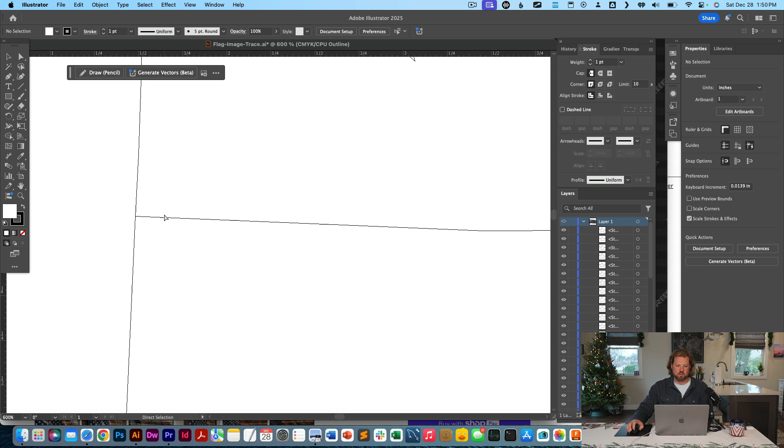So I started in Adobe Illustrator using Image Trace. And then I had to spend a couple hours kind of cleaning the image up. These stars did not draw properly from Image Trace, so I had to make a star for each one of them. And the real important thing is that every line crossing actually does land on the exact same point, so that when you export this to like an SVG or something, you get something in your CAD software, CAM software that just kind of works. So this took quite a while of cleanup, but once it was done, I kind of had what I needed here, and then I could export this as an SVG and bring it into CAM software.

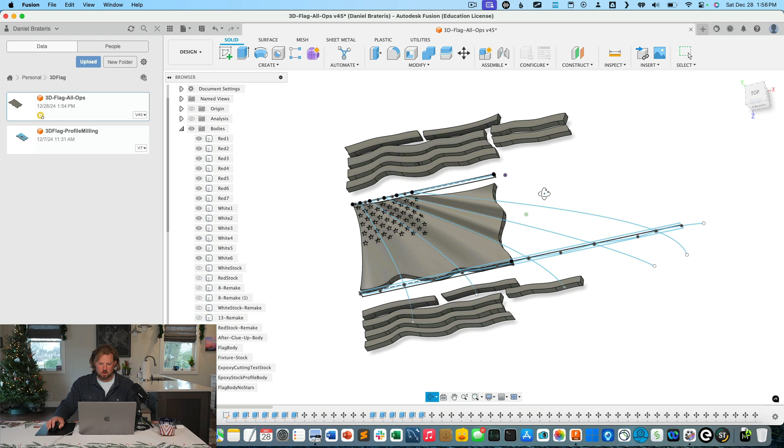So once we exported that file from our graphics software, we brought it into Fusion 360 here, and I made several things from it. So I made a solid body to represent the whole flag, and then I made separate solid bodies for the individual components that make up each part of the stripes.

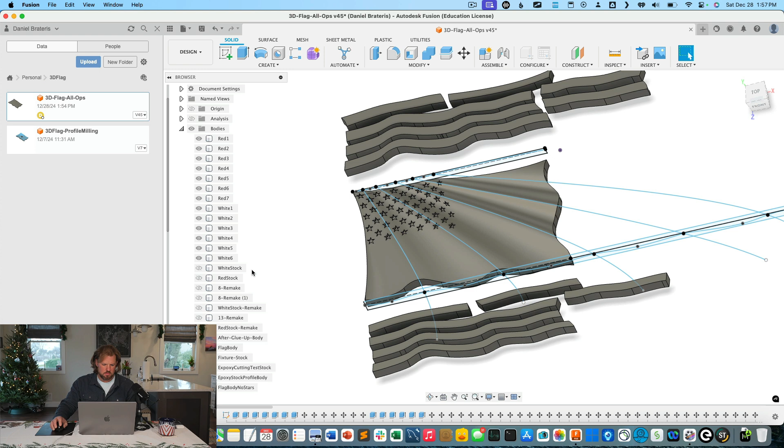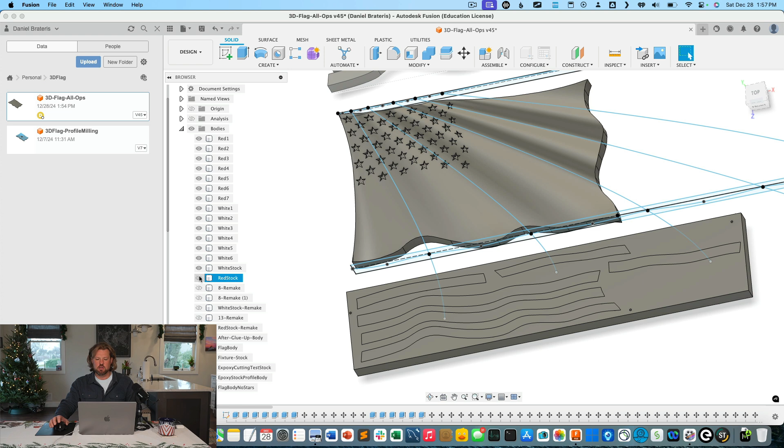And you can see that this is the stock that the stripes are going to be cut out of. And here's the stock the red stripes are going to be cut out of. So that's in cherry, and this is in hard maple. And one big mistake I made here is I really needed a larger piece of wood. This was just not enough space in between each stripe there to give us enough clearance to make really good hold down patterns and things like that.

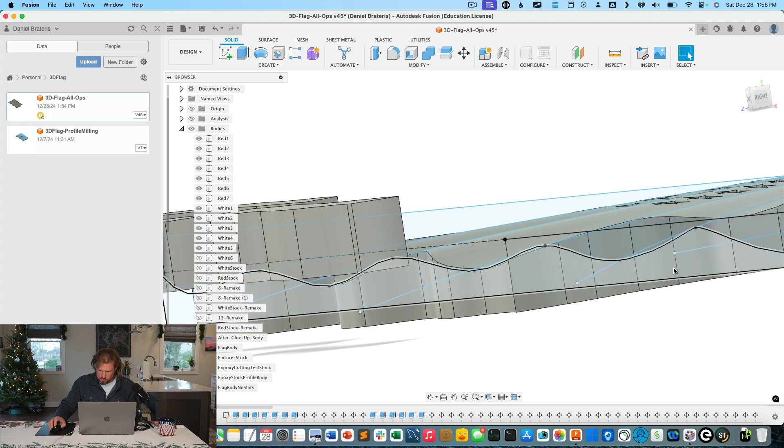And then making the body here, we started with sort of a flat body and generated these guide curves. So I don't know if you can see this sketch on this edge here has a bunch of waves in it, these waves here, and they are cut through the body and follow these guide curves over to a smaller profile on this side. And this allows me to control the depth of these cuts so that when I eventually put the epoxy in here, there'll be enough depth for each star. So I had to kind of tightly control that.

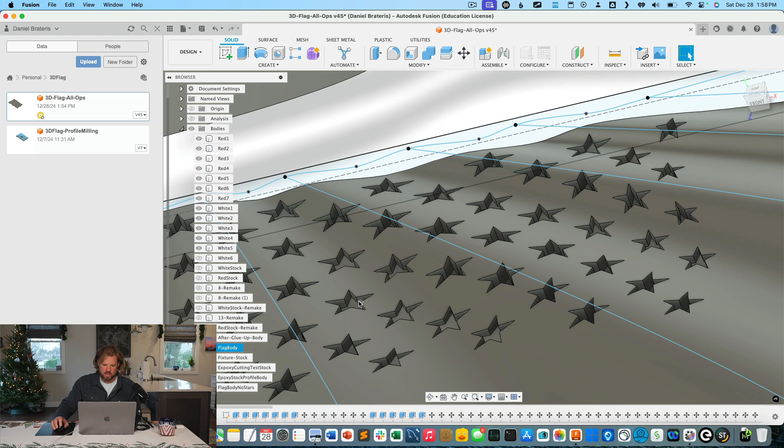I really only thought I could mill down about 0.5 inch with the size tools I had, and didn't really want to risk going really small with tools. This is what we did in Fusion, and I'll start showing you how this all came together.

So what we're starting here is by using a thickness planer to just kind of take the rough edges off both surfaces of the wood. And then we let the wood sit for a couple days before we mill it, just to let some moisture out, moisture in, just to let the wood stabilize. And that's pretty critical, so that it remains flat. I had to go back on the thickness planer again to flatten it out just a little bit more.

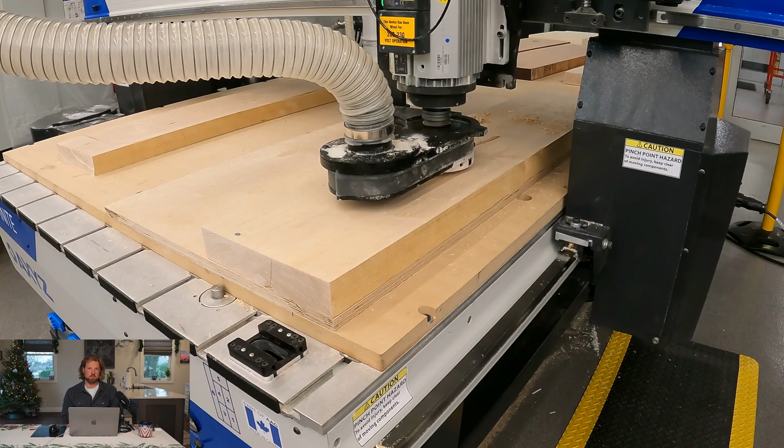And now we use the CNC to drill some strategic holes. So these holes are areas where I know the tool's not going to travel, where I can put screws to hold this piece of wood down to the table. So that piece of plywood underneath is vacuumed to the surface of the machine through a pretty strong vacuum, and this wood is not really flat enough, nor does it really have enough surface area, in my opinion. So basically, it gets screwed to the piece of wood that's vacuumed to the table, and now we mill those pieces out.

Now, ideally, I would have been able to mill straight down and through the piece of wood into the piece of plywood below it. But we were having some issues with splintering, and as you can see, I'm having a little bit of issue with dust collection there. I think this is due to the kind of tool that I had in the machine at this time, but we were getting through it, and where we ended up was just leaving about 0.2, maybe 0.1 of an inch on the bottom there.

So you can see that these pieces aren't cut all the way through, and then I use a bandsaw to cut those individual pieces out. And once that's done, we'll go over to a router table and use a copy bit to bring these pieces to size. Ideally, I could have skipped this step, but we were having some struggles with the machine and the wood splintering and curling up when we went to put tabs in it.

So this was the compromise, and now just using a copy bit to remove that excess material on the bottom. This worked really well, but was quite a bit of extra labor that I didn't really think was going to be needed to make these pieces. I think we could do better in the future.

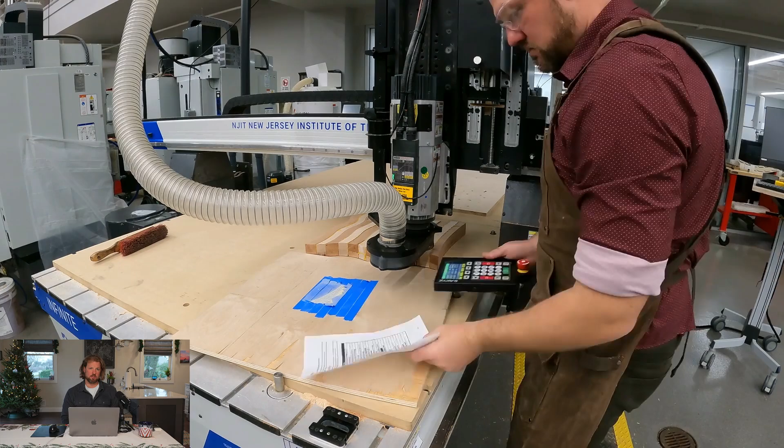And now I'm just using pieces of wood that are vacuumed to the table as a kind of rudimentary fixture to hold this thing in place when we face mill it. I'd love to put clamps on top of it, but then you can't face the whole thing in one pass. And to take light passes, this seems to work pretty well.

So you just take a light pass and block the piece of wood in with other wood on the vacuum table to hold it, and do both sides of this so that we have a pretty flat surface on both sides. And then we'll move on to prepping some of the seal coat epoxy.

So this is leftover resin from one of our colleagues' projects here. So thanks, Adam. This was for a surfboard he was making. And just wanted to seal the inside surface of where the deep pour is going to be to prevent any bubbles forming during the pour.

And here what I'm doing is drilling holes on the back side of the pour area so that the epoxy can flow into those areas to create an anchor point, so that it's not only holding on the surface. And now just seal coating this with epoxy, making sure I get into those holes with a brush, and sealing it up and let it cure for a day or so after this.

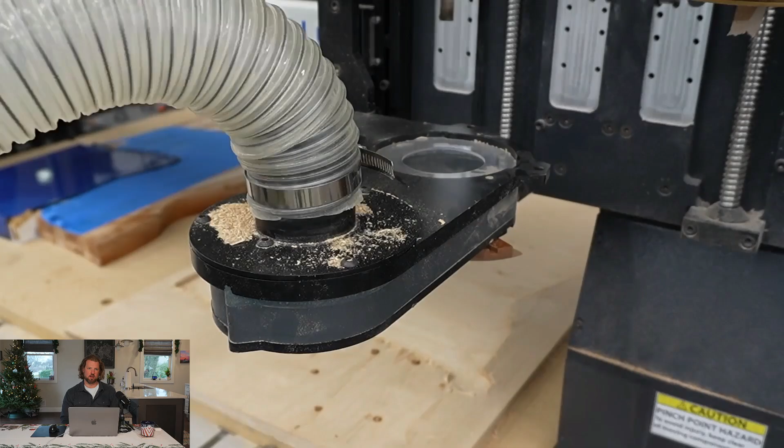And you can see we have a pocket milled there for the epoxy overshoot. And then what we use to hold this down is clamps. So you can see these two wooden clamps. Thanks, Danny, for helping me make those and think about the way to do it.

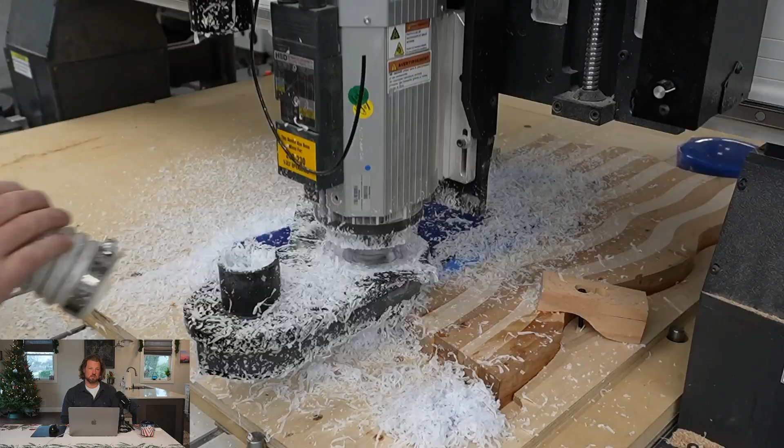These epoxy chips, man, for us, it just clogged the hell out of the dust collection system. So got some changes to make there as well. But it worked really nicely. These clamps held it down very well.

And then later, when we need to access the whole top, like now, we use little wedges. So there's about a millimeter gap around one side of the profile of the fixture of the flag that is in there, and we can use little wooden wedges that we can tap in to that gap to hold it down securely. And then if the tool comes around, it just mills that part of the clamp away. That worked really, really nicely for this.

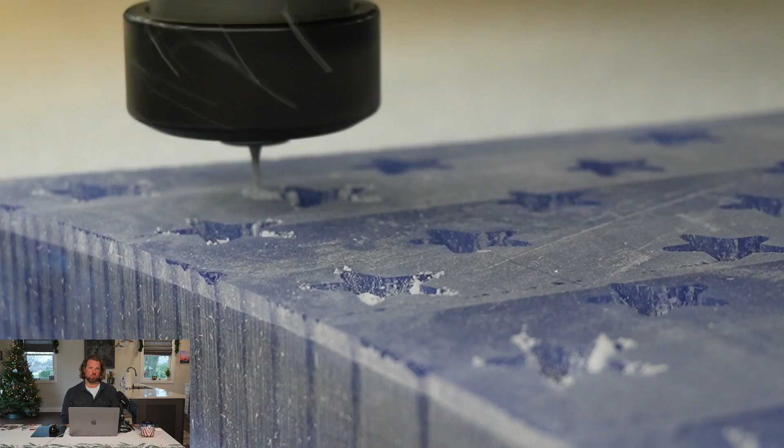And now we use two really tiny tools. I think one is a 1/16 inch end mill. And so that's what's going on here. We started with a 1/8 to do most of the roughing, and then use a tiny little tool to come in and mill the pockets for all these stars.

And using some hot glue to create a dam. Silicone would work just as well, but the hot glue sets up nice and fast, and I'm not pouring a ton of epoxy, so I think the hot glue works just fine in this case.

And mix up a batch of epoxy, so I'm just double checking my dimensions, and I actually used Fusion 360 to generate the volume of one of those pockets for the star. Multiply that by 100, since I'm making two flags, and then added a little extra volume, so I had enough to overflow all the stars.